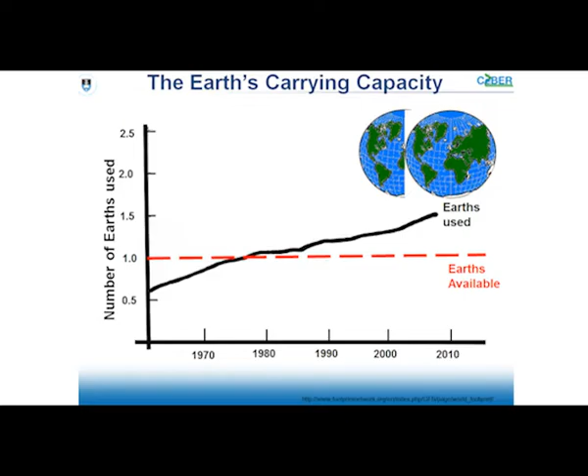So I guess we all know very well that we've only got one Earth whose resources we can use to sustain the lifestyle that we'd like to live. And we also know that over the last while, we have started to use much more than this one Earth. In fact, currently we use the resources of 1.5 Earths on average across the world to sustain our lifestyle. And this isn't just how it is. It's varied depending on where we come from, how developed our society is.

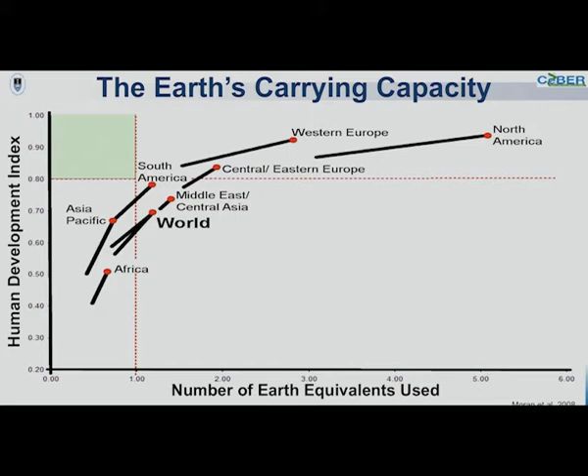So how has this come about over the last number of years? How we use those resources is made up of the cropland, the grazing land for producing food, forests and fishing, and the creation of built-up areas, and largely our use of energy. And you can see that while the increases in each of those has been moderate, considering how our population has increased, our increases in energy use has not been. The overall increase of about 4-fold over this 40-year period shown over here.

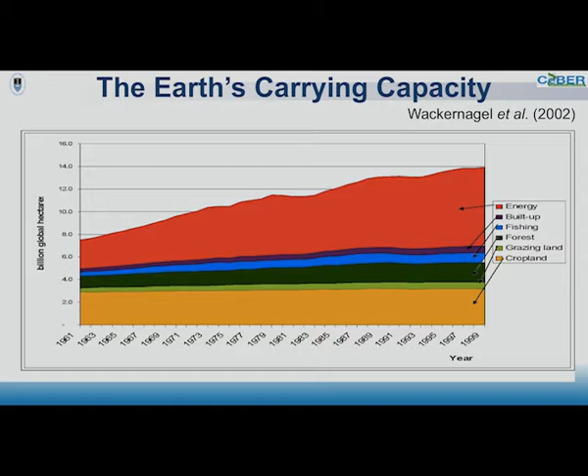And so really, if we're going to be able to sustain a quality of life we want within the Earth's biological capacity, we have to look at how we use energy. Okay, so what contributes towards this resource depletion, as I'll call it, and waste burden? A lot of it is about our consumption of products. And we say, okay, great, let's move the products we make from being created out of abiotic resources to using things which are renewable. Let's have a look at that.

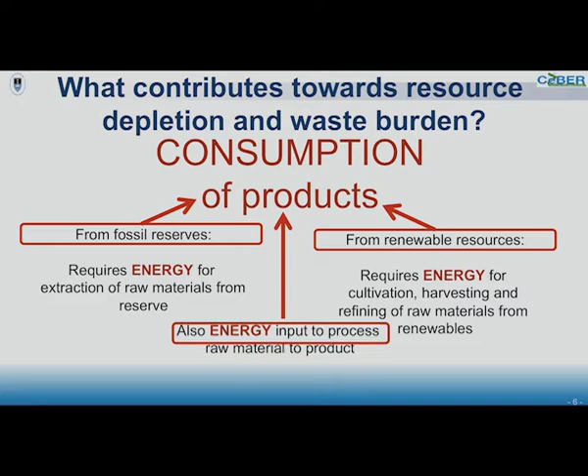So products which come from fossil fuels require energy for extraction of raw materials from that reserve. They also use up the fossil reserves. Products that come from renewable resources still require energy for cultivation, harvesting, and the refining of those raw materials before we can process them into the products that we want. There's a huge amount of energy in providing nitrogen to grow raw materials to produce these products. So we have to look at the whole chain of material and energy flow here.

So we can look at our industrial system then as an ecosystem. And you'll see that we have producers, generating energy, growing food, making agricultural products. We have manufacturers using those products from the producers, some of which are consumed directly. Manufacturers make products for the consumers. And we have waste processors recycling going here.

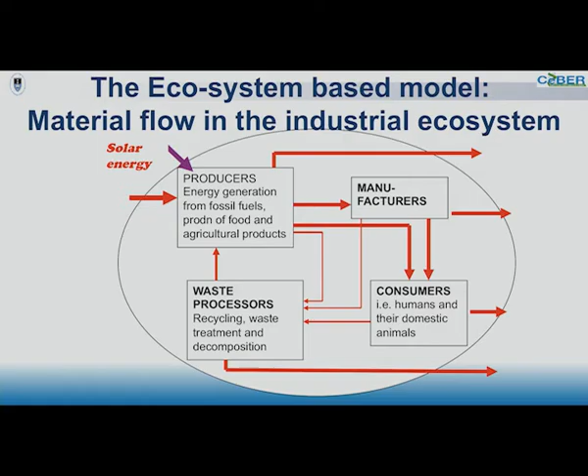But if you look at it, there are these big red lines that come in from the left, resources that we're taking, which are not necessarily renewable, and that go out on the right, wastes that we're creating. There's not much flow around the system. It's a more in-out, open system.

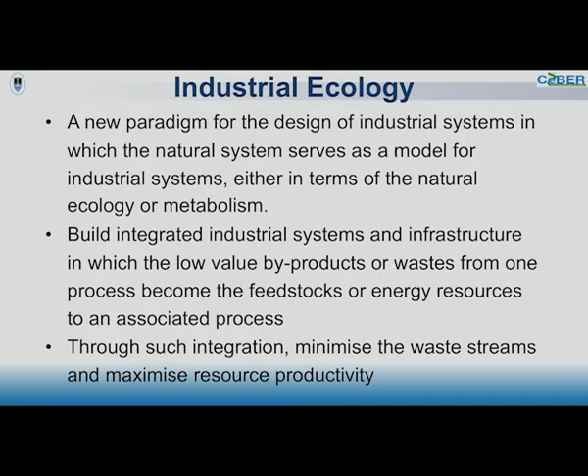And it seeks to build integrated industrial systems and infrastructure which use the low-value byproducts or wastes from one system as a feedstock for the next system, and so creating this integration. Through this integration, we can minimize the waste streams and we can maximize resource productivity, get as much out of each resource that we're going to exploit in a positive way as we can, rather than letting it become a waste.

So I thought now we'd look at a few examples. You can say, well, this sounds very ambitious, this sounds slightly unrealistic, this isn't how it happens. Well, there are ways in which this can happen. So my first example, each of these come out of work which I'm involved in some way. My first example is the mineral system. So we beneficiate lots of mineral sulfides, lots of minerals in this country. The mineral sulfides have the issue that if we don't handle them properly, they can create acid mine drainage. And we know lots about acid mine drainage in this country.

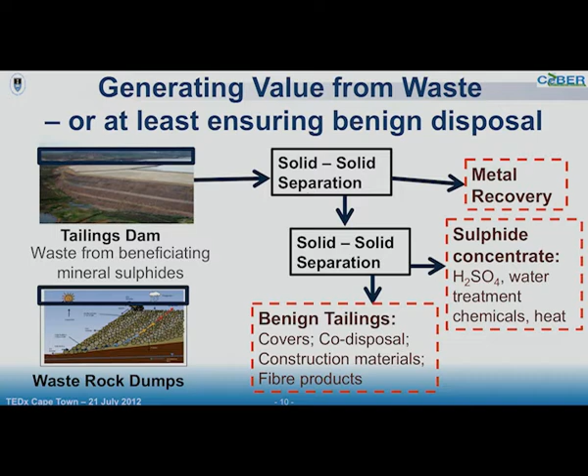So there are three sources from which that can come: the waste rock dumps, the big waste rock, the small, very fine particles which come out of the process, and obviously the used workings. We can actually process these fine particles through choosing how we do the separations, either in the existing process or adding some on the end, to recover more metal, but also to recover that sulfide, which would become acid mine drainage if we didn't handle it properly, and to get most, typically about 90% of your reserve, as a benign

tailings, which you can either just return to nature quite happily, or you can use to do things like cover rock piles or make construction materials. This sulfide concentrate can actually be used to make products in the best case, and maybe would reduce the sulfur that we import into South Africa.

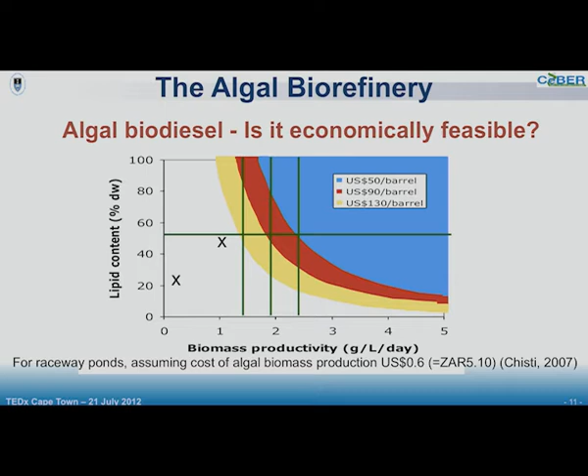Moving to a different example, we've all heard about the potential of algae for making biodiesel. Lots of hype about it in the literature. Can we do it? We can do it technically now, but we can't do it economically. We need to up the productivity of the system. Those are the crosses of where we are, the green lines of where we need to be, and the colored circles are the regions we need to operate in to compete economically with crude oil, depending on what price you have. Okay, so we can go back to the lab and do a lot of work on improving these productivities such that we can make biodiesel production economically feasible. One route, something we can do.

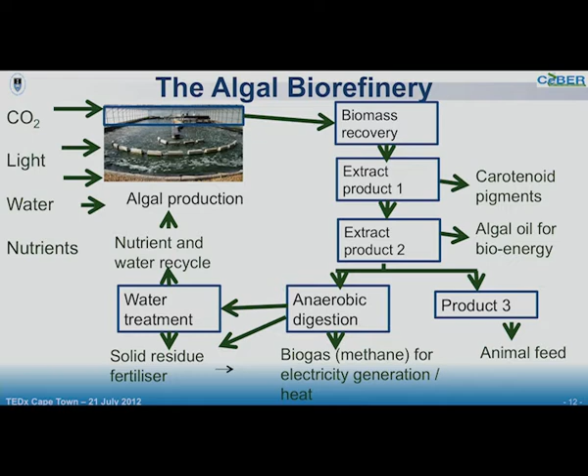Alternatively, we can put biodiesel as one product into an integrated system of products. We can use the potential to take up CO2 from the atmosphere with light, water, and nutrients. We can make the algae, and rather than just creating this one product over here, we can create a series of other products, high value, animal feed, other energy products, in order to be able to get an integrated system which then is economically feasible.

And one third example that I'd like to look at then is the wastewater biorefinery. Now, if you look at many commodity bioproducts, you will spend about 2/3 of the cost of that product in providing the raw materials with which to make it. Wastewater, which we have in every city as domestic wastewater, requires us to spend energy on treating it to get clean water at the end.

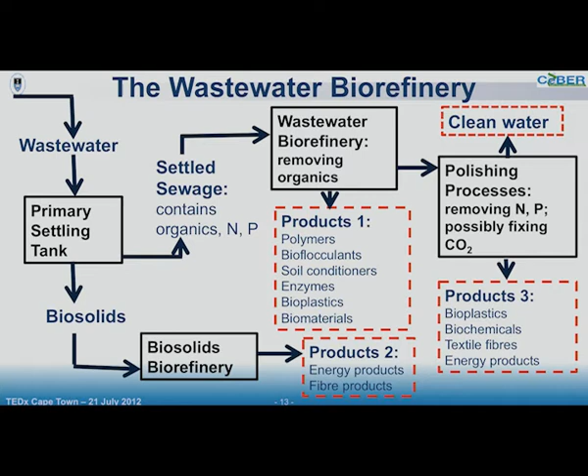We can actually integrate this whole thing, having a primary settling tank at the beginning to create a settled sewage sludge over here, which actually is just a resource of organics, nitrogen, and phosphorus, what we're going to need to produce any bioproduct. In the wastewater biorefinery, we then look to use those nutrients to produce this whole range of products that I've got up here.

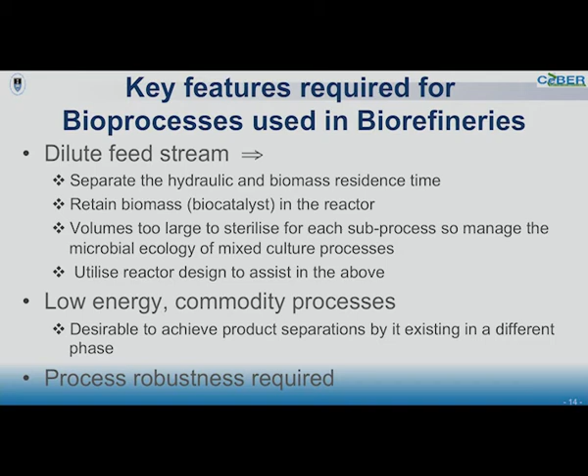The challenges here are that we need to think quite differently about the kind of processes we're working with. And this slide here is for those of you who are interested in the scientific challenges. So instead of having the feed stream that you'd create exactly as you want it to be, you now have this dilute feed stream, this variable feed stream, and you need to be able to design your process to handle that. So we need to be able to separate the flow time in the system and the biomass time in the system.

We need to be able to retain biomass, which is our catalyst, in the system. We need to work with a process that we don't have to sterilize and have only the catalyst we want, because we can't afford all that energy in such a dilute system. And so we need to work with microbial ecology to be able to get a microbial ecosystem going, which can still make our product.

We want a low energy commodity process, and so we need to not need a complex extraction chain, but be able to design our product such that it will exist in a separate phase to allow us to extract it easily. But mostly, we need process robustness. Okay, and so this was just looking at some of the real changes in reactor design that we might need to think about to achieve this.

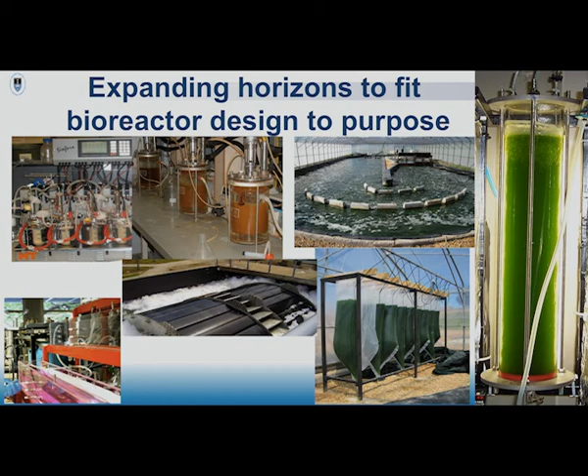Let's come to what the challenges and benefits of these biorefineries and integrated processes are. So I talked in the last little bit there about more of the technical challenges, things which interest us engineers. But there are also real challenges about how we conceive these processes and how we work from the more people business aspect of them. So one of the key challenges is that we need to share information. We need to share information across processes, across components of those processes, and across associated industries. We're not always that good at sharing information, so it's something we need to work with.

We need to be able to handle perturbations in one process. They'll affect the process downstream of us, and we need to design for that. We typically want to design our processes to be completely independent of any perturbations from outside. We cannot do that in this kind of integrated system. And obviously, we need to be able to work in an interdependent kind of way. Not an independent process, but interdependent processes.

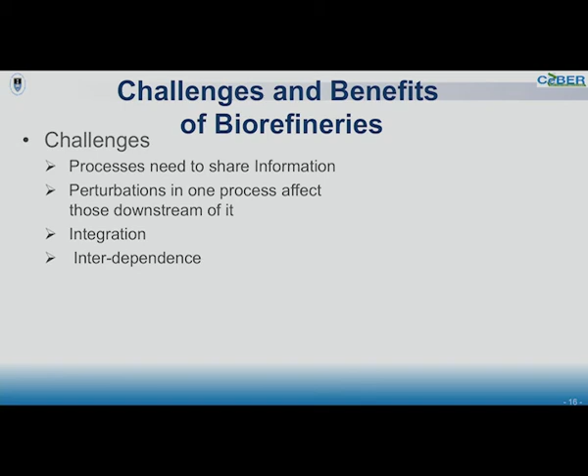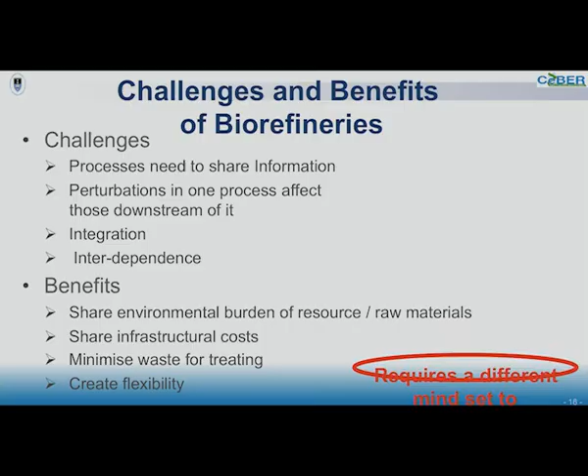What do we get from this? Well, from this, we get the benefits of having the environmental burden being shared across the different products that we're producing. We are able to share the infrastructural costs, and we're able to minimize the waste that is created that requires treating. And we can create flexibility in our process to create different products at different times in response to different wastes. This all requires quite a different mindset to designing and operating single standalone processes. So not only do we have a technical challenge, but we have a challenge of how we approach this.

Okay, so to sum up then, to sustain an appropriate quality of life for an expanded population, we have to maximize productivity from every resource that we exploit and minimize the waste created in doing so. This requires paradigm shifts in our way of operating. And one such approach is to look at the integrated design of process clusters, using this kind of industrial ecology approach. And in so doing, we need to be able to take on a different business management thinking process. We need people who can work together at the interfaces of disciplines. And mostly, we need to accept interdependence of our processes.